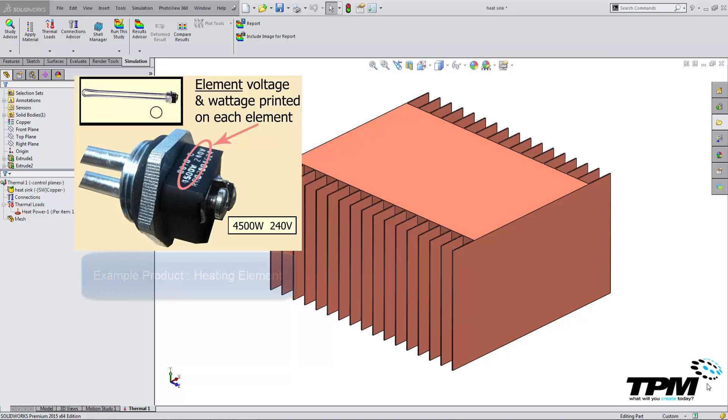On my screen I've got a heat sink, and for a lot of products you can tell on the package if there's a certain wattage or a power provided by that product, and you can kind of tell how much heat could potentially be generated by that product. But a lot of times they really don't give you a lot of information about how hot that product is going to get if it's in open air or if it's in an enclosure.

So that's why we use products like SOLIDWORKS Flow Simulation and SOLIDWORKS Simulation Professional to determine these values. So if you're trying to determine how hot a heatsink is going to be in its environment, simulation is a good way to do that, but there's a few tricks that you need to know to obtain the right values

and the right information. If you have SOLIDWORKS Flow Simulation, you can actually import the convection data from that simulation into your thermal study inside of SOLIDWORKS Simulation Professional. You can click this box, click the study, and it will actually create the thermal loads for convection for this heatsink.

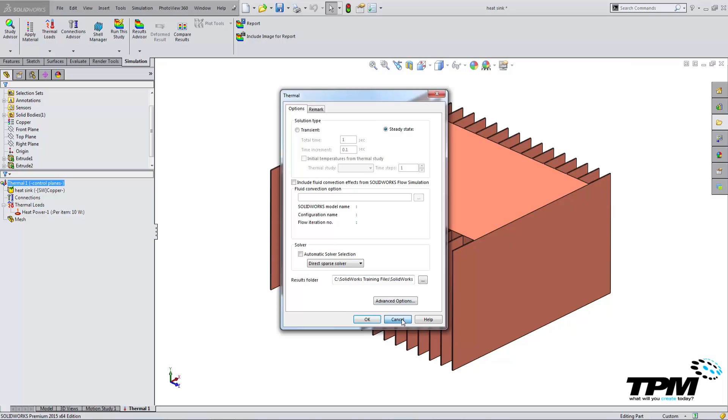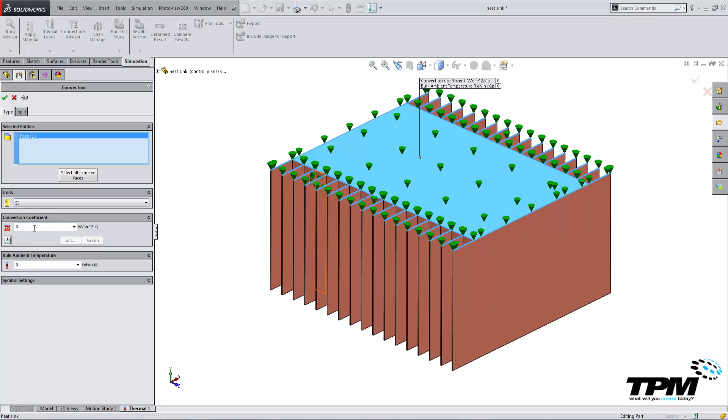More often than not, you don't have access to that information, so you'll have to actually add convection manually by clicking on some of these faces. But then, when you get to the convection coefficient, a lot of people don't necessarily know what value goes inside of this box. You can make a pretty good guess by looking in a heat transfer book, or you can calculate it. I'm going to share with you some resources.

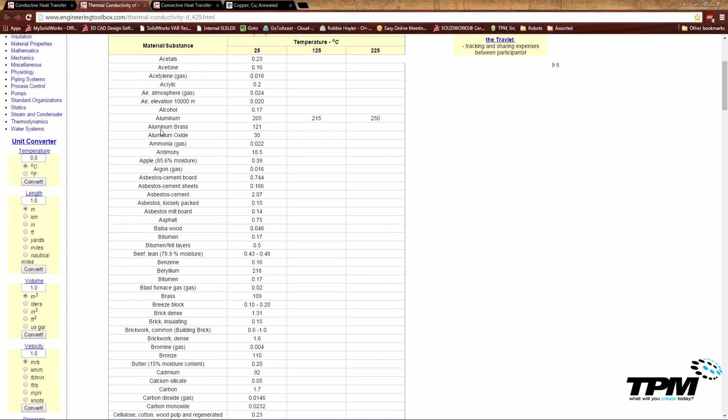The engineeringtoolbox.com is a very nice website. It'll find a lot of different engineering equations you can use to kind of check some of these values inside of your designs. One of the ones I would really point you guys towards is the conduction tables inside of the engineering toolbox. So we have a list of thermal conductivities for common materials.

And we also have a convection heat transfer, and I would point you guys down to this equation here to calculate the convective heat transfer coefficient for air. Now, if you look inside of a heat transfer book, you'll see some of these. Free convection for air, gases, and dry vapors is anywhere between 0.5 and 1,000. Well, if you put that in a SOLIDWORKS simulation as 500, it may or may not be the right value.

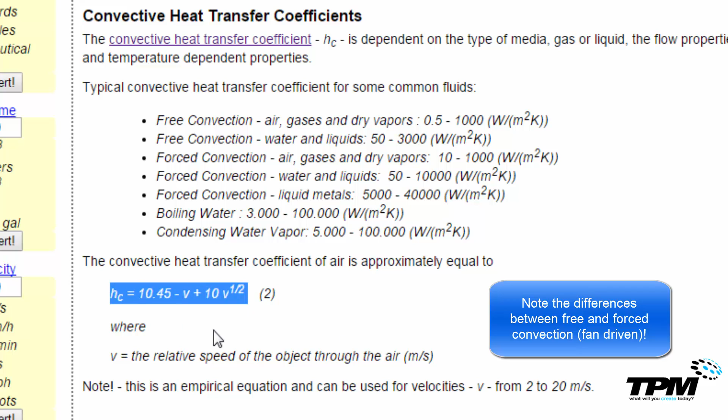So if you know the velocity of the air moving across your heat sink, use this equation here to calculate that. And that way, when you go back to SOLIDWORKS simulation, you'll have an accurate number and you'll get a more accurate simulation.

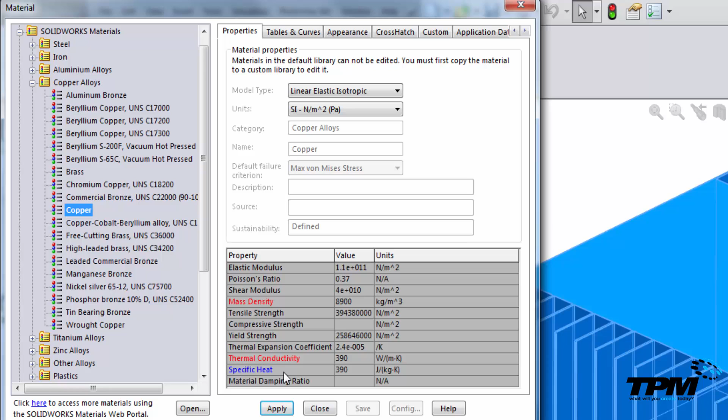The last resource I want to share with you guys is that inside of the SOLIDWORKS simulation material library, if you're inside of a thermal study, you can see in red what SOLIDWORKS simulation needs from the material to get an accurate material for the simulation. So in red, I need the mass density and I need thermal conductivity. In blue, specific heat would be something that is nice to have, but it is not a necessity.

If you go to the tables and curves, you can actually check thermal conductivity versus temperature of this material. Now, in this case, I don't have anything inside of my dialog, but if you have that from the manufacturer or you need that information to get an accurate simulation, another resource I would share with you guys is MatWeb. So here I'm making this heat sink out of copper.

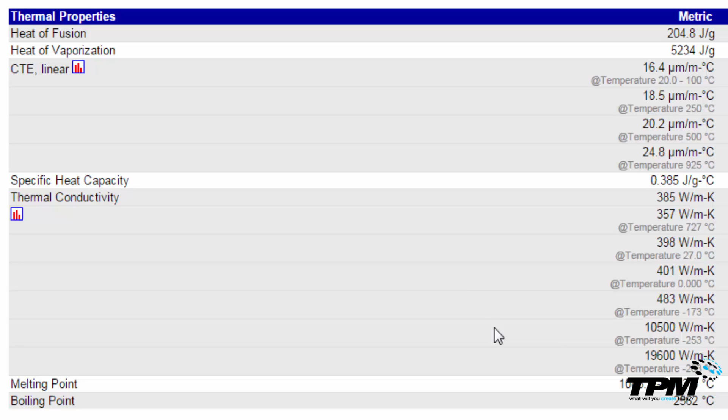I can go and find the material copper inside of MatWeb, and this is a very, very useful and accurate engineering database for materials. It's very commonly used in industry. And I could come down and see that I have a 385 watts per meter Kelvin thermal conductivity for this material. But you can also see that it changes with temperature. So you can see that people have put different temperatures in here, temperatures and thermal conductivities that have been tested in a laboratory.

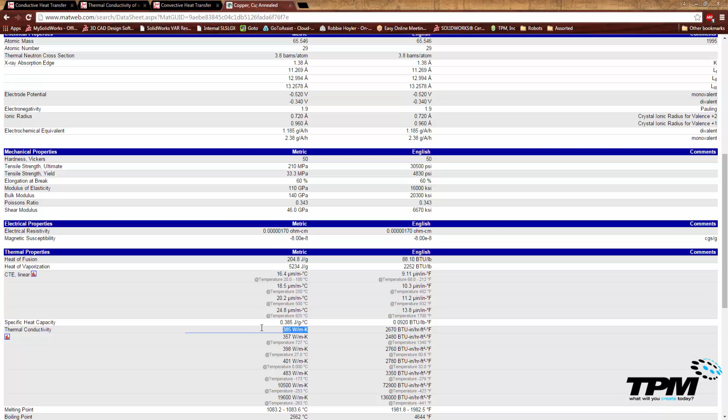So MatWeb is a very, very useful database to make sure that your material that you're actually using in your simulation is the right one, because 390 is what I have inside of my thermal conductivity for copper in SOLIDWORKS, but that may or may not be the right conductivity. So you need to check this every time you use a different material. If you can get the material information from the manufacturer, that is going to lead you to a more accurate solution.